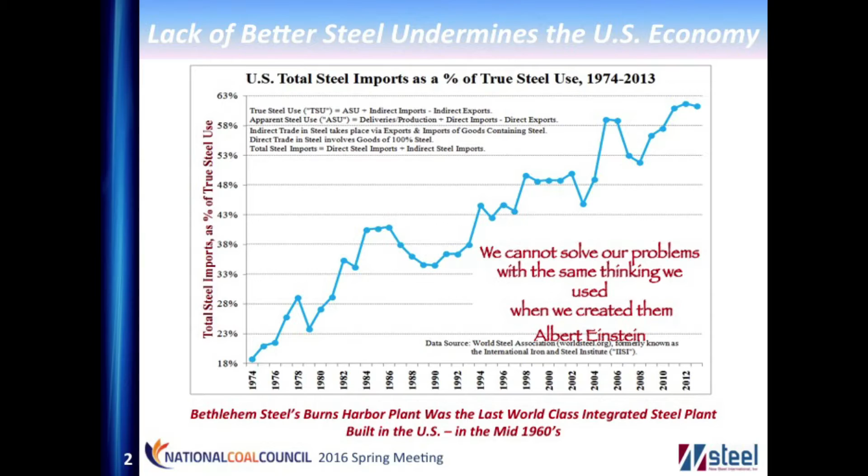Here's an interesting picture that shows you where we are in the American steel industry. It's a sad decline. I didn't originally come from the steel industry, so when I started working here, we had a very good industry at that time, but from the first oil crisis in the early 70s to very recent in 2013, imports took off from less than 18% to more than 60% of our steel consumption in this country, more than 60%. It is unbelievable. And I don't need to tell you all the political ramifications and the industry ramifications, but the impact on manufacturing, on jobs, on all kinds of industries is amazing.

There was a short period of time in the 80s and 90s where a couple of mini mills established a sort of a trend reversal, but they were reined in and said, no, you cannot do all this. So the trend continued, and the imports kept getting bigger and bigger. Now, interestingly enough, many people are worried about China. China is not the biggest importer in this country. They are ranked number 7. So this is all high-quality steel that we cannot make in this country. That's what's being imported today.

So what we felt out of this is focusing on non-commodity material, but focusing on really high-strength and highly advanced materials, starting with the auto industry, but going into a number of applications. There was a great case to be made, and that's when we worked with this Russian company that unfortunately ended up having to pull out. Next. So what coal and steel allows you to do is connect the dots in ways that most people hadn't thought about.

And this is really cross-cutting, as we said earlier, is the opportunity that you can see with coal and steel. Since nothing was invented or invested in this country in more than 50 years, the last high-class steel plant in this country was built in the 60s. Everything else were really recycling companies that cannot really compete on the top level. With that, we think we have an opportunity. We had a Russian partner, we got very far, and at the end, we couldn't get there.

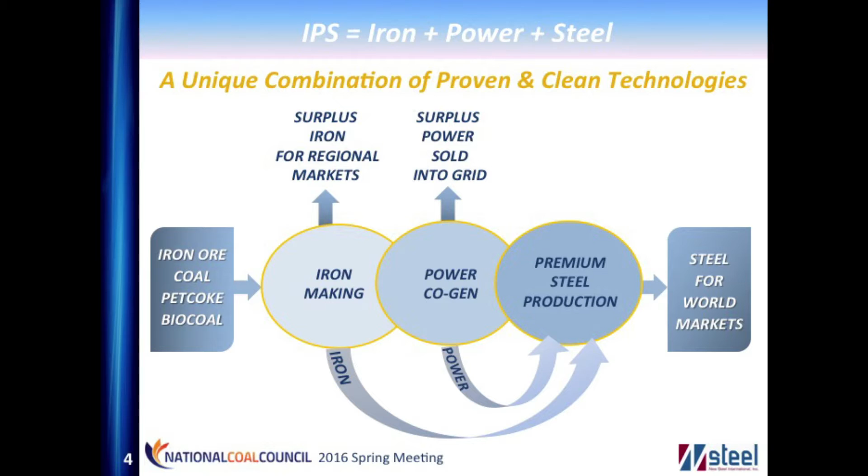Next. So what we do is we make steel for the domestic market, and we will probably sell something overseas, or at least in North America. And excess iron we can sell into the local markets for other mini mills and for foundries, and the electricity we are selling into the grid. Next.

I don't want to go through all the details here, but I can assure you that there is huge interest in projects like this in North America. We had a couple of meetings with representatives from the Department of Energy already. We have very strong interest from the auto industry. There is a huge need for better raw materials for a number of industries. And at the end, what we are doing could also become an export article for carbon management in other countries, because this is a very innovative idea, and yet we are not innovating anything. It's all existing technologies. Next.

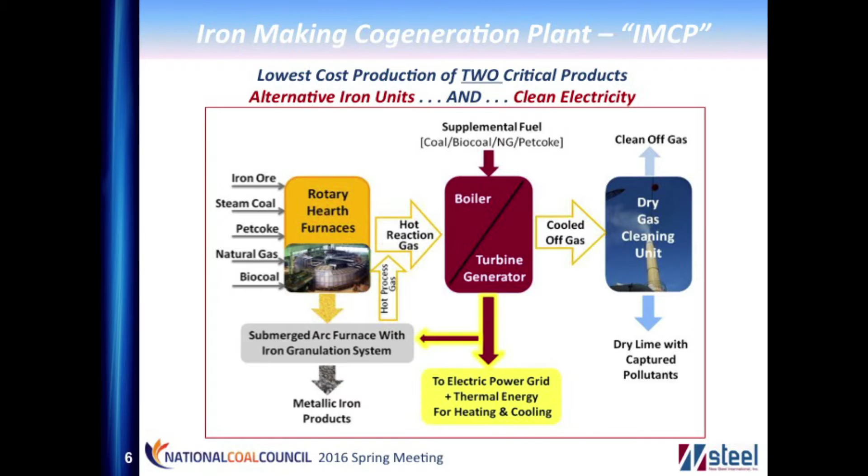The basic idea is very simple. We are using a technology that was invented in Ohio in the 60s, patented in Ohio in the 60s. And of course, like so many other good ideas, it got ignored. And we picked up on it when I was at US Steel. We ran all the numbers. We realized that this is the low-cost way to use moderate quality iron ore and coal. And the material that comes out of here goes into what's called a submerged arc furnace, and that makes iron product. Not to be confused with steel, only iron.

And then the hot reaction gases go into a large, essentially utility scale cogeneration boiler that uses waste heat and supplemental firing, so it gives us a large range of flexibility. And the power goes either into our own melting operation, or into the steel making operation, or into the grid. And for pollution control, there are a lot of sophisticated pollution control systems out there. We chose some that operate dry and don't create a lot of waste and sludge. And so what we have is essentially two revenue streams: electricity and iron products. Next.

We have a gentleman from Babcock & Wilcox here with us today, and we have a very close relationship with B&W. Joe, if you wouldn't mind saying a few words about our work here, and maybe you can find a microphone. Yes, can we get the microphone up here, please? Thank you, John.

B&W and NSI have had a pretty long relationship, about 10 years now that we've been working together. And B&W is really excited about this project for a couple of reasons. The first is, as you can see, this is core technology for us. It's nothing out of the norm. It's very robust, well-known technology. The one novel thing about it is we get about 40% of the heat input as waste heat from the iron process, which means the coal we need to fire to achieve 100% load is about 60% of what we would normally need.

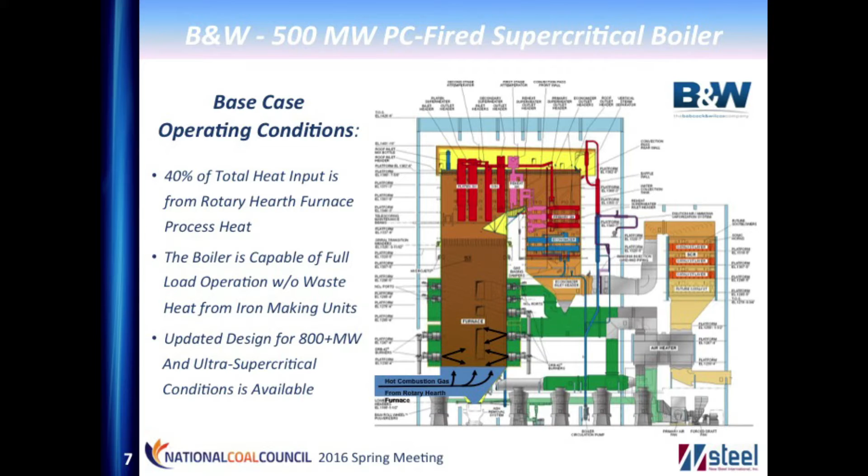And that means we can meet all the emission requirements and all the permit limits without having to do anything novel. So it's a really cool and novel application of well-known technology, and we applaud John and appreciate his partnership through the years. Thank you. So I'll turn it back over to you. All right. Thank you, Joe, very much.

And this boiler is what's called the classic Benson boiler. We have the classic boiler structure here. We have waste heat coming in from the iron making process. And back here we have NOx controls through, again, a standard selective catalytic reduction system. The first plant that we are working on in Ohio is a 500 megawatt boiler. We have worked with B&W already on 800 megawatt and even 1,000 megawatt boilers that still meet all the new emission standards without the need for carbon capture. And if we can go to the next slide, please.

This gives you a quick overview as compared to one of the AEP plants in Ohio that are being shut down. The columns here represent the heat rate of electricity generation, and the red line represents the CO2 emissions on the right side per megawatt hour produced. This column here is the heat rate of about 10,000 BTU per kilowatt hour produced in a high quantity power plant in Ohio, and the CO2 emissions are up here, which is about 2,100 pounds per megawatt hour.

The next column is the average of the American coal-fired fleet as of 2014, all published information from the Energy Information Administration. So you see the CO2 is a little higher. When you go to the average of the American natural gas-fired fleet, you see that the CO2 is much lower, but the heat rate is still about 8,000.

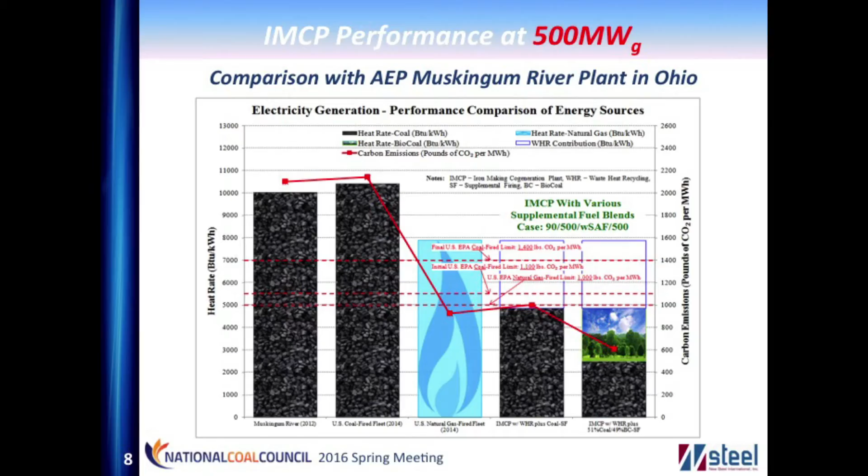You see three dotted lines here. One is the CO2 limits for natural gas-fired fleets of about 1,000 pounds per megawatt hour. Then EPA announced an 1,100 line that we actually designed for when we designed this plant, and then they lifted it up to 1,400. But you can see that our basic design is already well below the 1,100 and certainly below the 1,400.

So all these things essentially show you that you can use carbon in a more innovative way. There is no R&D required at this point. We can basically move forward with this fairly quickly. Next.

In the Ohio case, using the metrics that DOE and others have published, we just compared the benefits of our project to the carbon dioxide emissions of all the coal-fired plants in Ohio. And in 2014, all the coal-fired plants emitted 87 million metric tons of CO2.

When you look at our design and you recognize the benefits from making better steel for the auto industry, and you allow the auto industry to build lighter, stronger, and safer cars, and these are all metrics that the DOE and the auto industry have published, we can eliminate 55 million metric tons of CO2 with one plant alone. So it's a pretty big bang for the buck, and we are looking forward to building one and hopefully more than one here in the United States. Next.

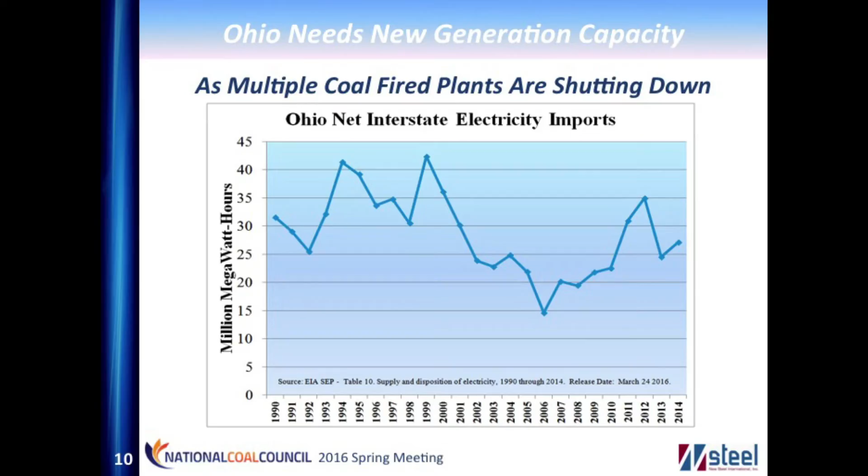Ohio is a good place to do this. Ohio is the largest electricity importer in the Midwest for a total of about 25 million megawatt hours in the last numbers we have. A plant like ours that is designed to use 2/3 of the electricity internally for iron and steel production and 1/3 to sell into the grid and to drive the financing would essentially provide about 1.4 million megawatt hours per year. So doing this in Ohio is certainly a very attractive proposition. On the next chart, please.

We did the same information for a project in Michigan and also for some other locations. We used a reference plant that is operating in the Lansing area; the plant is still operating, but it is scheduled to shut down in a few years. The heat rate is about 14,000 BTU. The CO2 emissions up here. Again, here is the average of the American coal-fired fleet, natural gas-fired fleet.

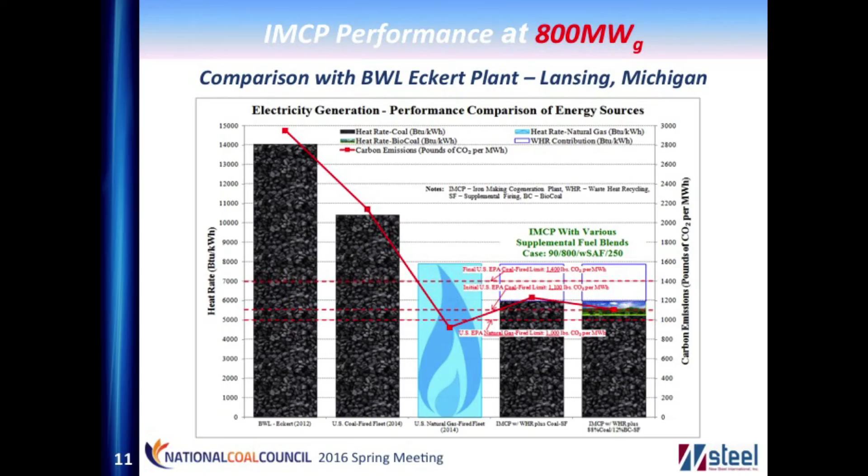And now for an 800 megawatt unit, you can see without using any biocoal that we are still well below the 1,400 limit. And then with biocoal, we are actually back below the 1,100 limit that was originally proposed. On the next slide,

you see the overall flow sheet. Very simple. There's nothing new in here. This is the flow sheet that you just saw. We use the electricity in our iron making process, and we use electricity in steel making. And whatever we don't use internally can go into the grid.

We are also using thermal energy for combined heat and power if the location allows and justifies it. And we also had some projects overseas that for political reasons didn't move very far, but we are still working on it. You can use the CO2 as fertilizer in greenhouses.

And when you look at some of the things that people have done in this country, the biggest tomato farm in California is using CO2 as a fertilizer today. It's a fantastic plant. These guys did a wonderful job. So you don't have to put it all into the ground. You can use it for something else as well, and it's been done many times before.

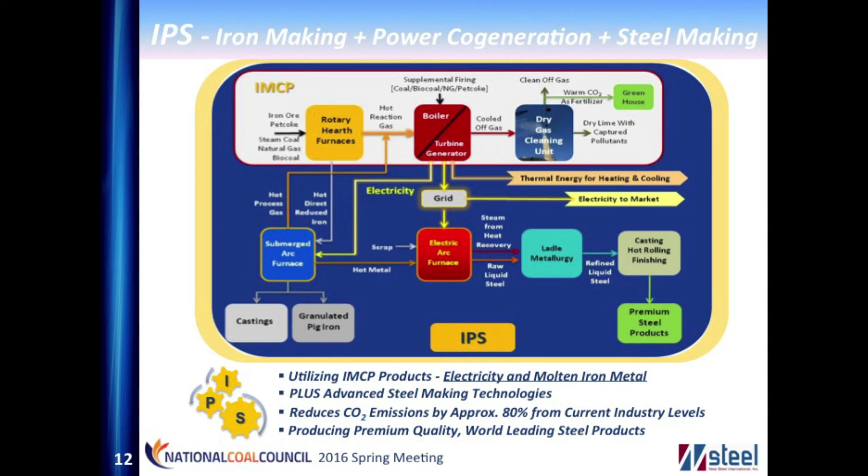On the right, our specialty really is this end here, to make super high quality liquid steel that cannot be done in this country today, and then making premium product steel quality for the auto industry. I can just tell you that when I worked at US Steel, we were also making very high quality steel, but the objective was to make it very soft, which by the way allowed us to sell lots of it because you needed more to build a car.

Now you go into high strength steels that are 4, 5, sometimes 6 times stronger. And in addition to that, using some of these new characteristics, they have a safety performance that allows you to absorb 3 to 4 times more energy in a crash situation when you have an accident. All these things are on the market in Germany today, but you cannot get them here. So the auto industry, understandably, is very annoyed about this and says, what can we do? Well, now we're working with them together, and we are getting some support from the DOE so that we can move these projects forward here in North America. Next.

On the steel side itself, just using everything that I just showed you, this is the energy consumption and the CO2 emissions of the worldwide classic steel industry that makes high quality steel today. You can see the CO2 up here and the primary energy consumption here. Our plant in Ohio will be operating down here. This is our primary energy consumption, and this is our CO2 emissions. No new invention, just putting things together that already exist.

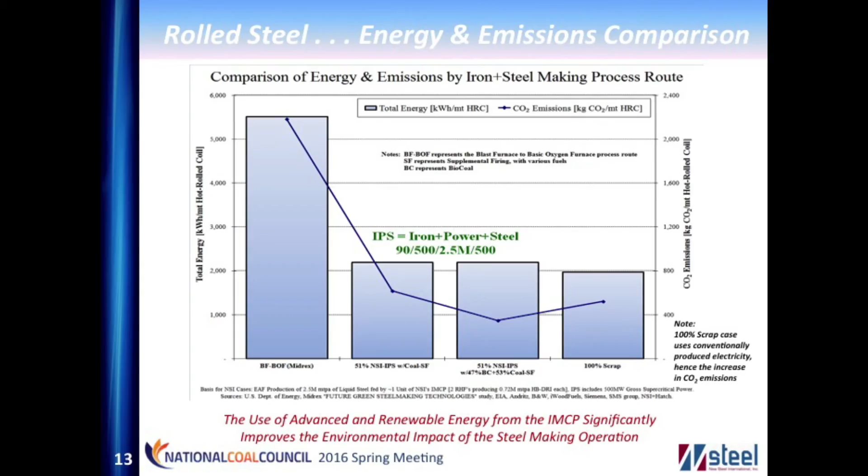And when you go all the way to the right, you see a scrap-based mini mill that uses 100% scrap. The CO2 goes up a little bit because our assumption is that it uses coal-based electricity, and in today's market there is still a lot of CO2 here. So again, it's all existing, and it's obviously very, very attractive. Next.

Coming back to climate change, we all have an obligation to work on this. There can be many different opinions, and I've heard many of them. I'm not a climate change expert, but I've certainly educated myself over the years, and I realized that something has to be done. And frankly, in our case, it's very economical. It's very financially attractive. This does not increase any cost. What we are doing actually lowers cost.

And we got this out of a report in January from the Rhodium Group, using the numbers that this country has already committed itself to with all the policies that at least have been documented by this group. There is still a gap of some 220 to 350 million metric tons by the year 2025. And we think with our technology and with the user community that we already see, we can make a significant contribution to closing that gap.

And if we work with people like Babcock and Wilcox on their next generation carbon capture technology, which I personally find fascinating because they're using coal and iron, which really made me happy. Chemical looping using these ingredients can be extremely efficient. Next.

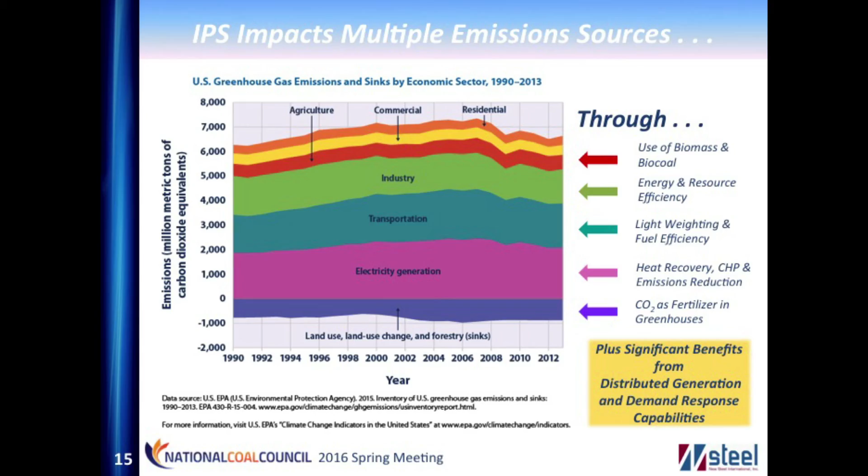You're essentially impacting every one of those areas that EPA is tracking, and you can see our CO2 emissions went down quite a bit, but now they're tracking up again. So something needs to be done to comply with our commitments. And of course, it certainly is a good tool for distributed generation and also for fairly high capacity demand response capability.

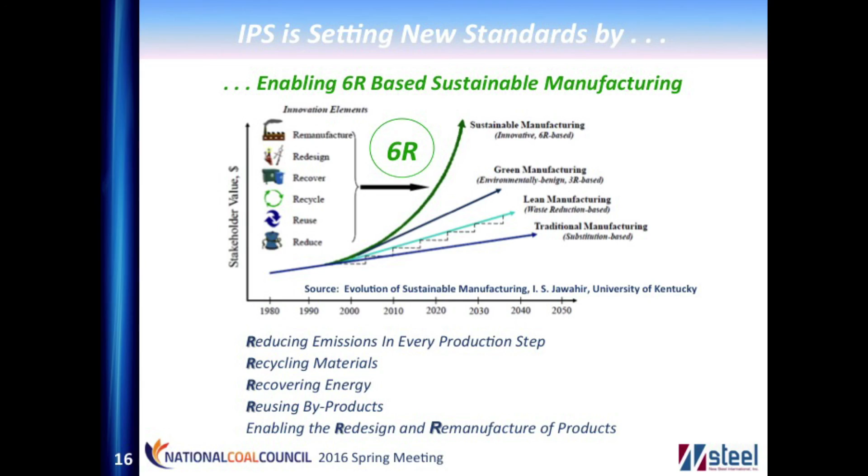The last item that I wanted to bring to your attention, if you can go to the next one, please, is manufacturing. We lost millions and millions of jobs and subcontracted to other people. We have run up a $10 trillion trade deficit over just 15 years, $10 trillion. The impact is just unbelievable. But seeing the positive, we can bring a lot of that back because nobody outside this country has anything like this. So we can take the lead again, and we can restore some supply chains and some manufacturing bases that are second to none in the world.